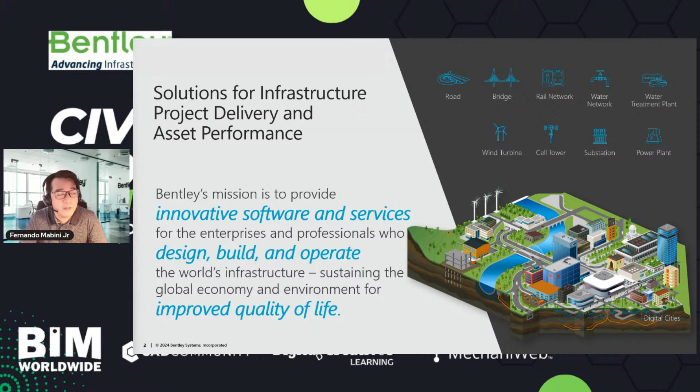But in civil, we stay focused on transportation. We have solutions for numerous industries, but today our focus will be more on civil works in general, specifically for the Philippines data set. In a gist, anything that involves moving people and goods around the world, Bentley has a specific solution for it. But let's start with a little bit of history of BIM, especially civil BIM.

So 30 years ago, our industry was living through the digital transformation of CAD, which was taking what we were doing on paper and moving that to the computer. And then there was the next disruption, from CAD to BIM, or building information modeling. So now, at this moment, our industry is advancing beyond that.

Okay, we are basically moving from BIM, and for the last couple of years, we at Bentley Systems have been working hard at adding the missing dimensions, such as the dimension of time and the dimension of context. Okay, so let me dive into our purpose for today. Our topic for today is about OpenRoads Designer, Philippines standard.

So what's inside this standard? What is this standard? So basically, the Philippines data set is actually composed of different types of engineering principle. What consists of the Philippine standard is the CAD standards, and we have a road standard details, and then we have the design guideline criteria and standards, or we call it in engineering as DGCS, or green book or blue book, or whatever you want to call it.

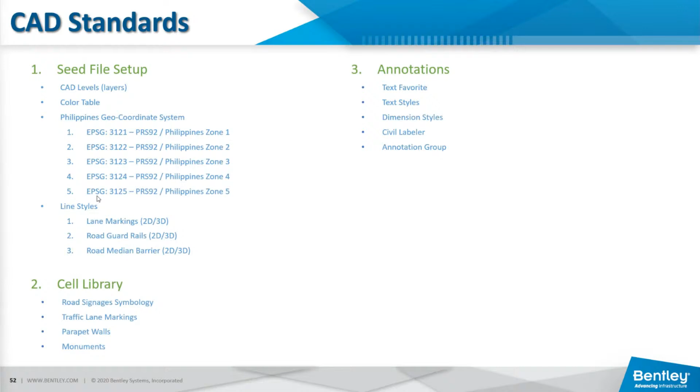Okay, so the next is annotations. We have text favorite, text styles, dimension styles, civil labeler, and annotation group. What are those? Basically, this CAD standard falls into our deliverables. What are those deliverables? The drawings. During the project, even though we are in a 3D modeling era now, the 2D drawings will not go away, maybe for the next 10 years or so. It will still be useful. That's why we still have CAD standards.

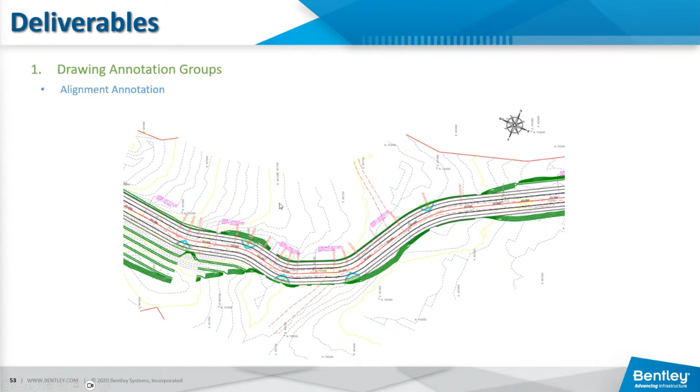So, in the drawing on the plan view, we call it annotation groups. We consolidate all those CAD standards and put them into annotation groups, and we apply them to every element that you see here in the alignment annotations. Even those contour lines have those CAD standards. Even the north symbol right there is part of the CAD standard as a cell. For the long section profile, the annotation group is also defined. For the cross section, annotation groups are also defined.

Okay, so now let's take a look at the roadway standard details. Basically, those roadway standard details are composed of pavements, the road kerbs, the slope protection. You have the guardrails, the signages, pavement markings, the monuments, as mentioned earlier, the traffic regulatory or prohibitory signages, the warning signages, traffic information signages, and chevron signages. So those are the roadway standard details.

And how about the DGCS? The engineering principle of the design. Those are in connection with the horizontal and vertical alignment. To the horizontal and vertical alignment, we apply a design speed, a superelevation, or road widening, so that when we create that in a model, we can determine the speed requirements of your road alignment.

All right, so now we're going to dive a little bit into the technicalities. We're going to create our project, and I'm going to show you the workflow of the project. So what is the workflow of the project? Let me show you some slides. Okay, there you go.

The advantage of OpenRoads lies in the continuity of the workflow from the preliminary to the detailed design stage up to the project delivery, regardless of the data deliverables your project may require. That means we are going to start with collecting all the data, be it the reality model, the point cloud, or the TopoCAD files.

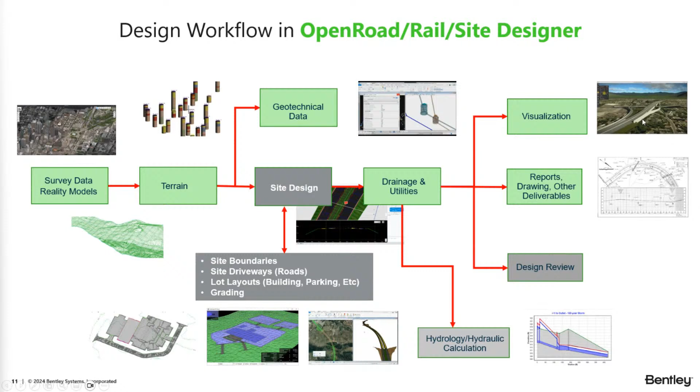Okay, so after that, we are going to create your site model or your road corridor. And then if there are drainages that need to be created, we are going to create them, drainage and sewer lines or utilities, and then drawing production for your deliverables, or design review platform. And then lastly, if you need to visualize your project, you're going to use our LumenRT application software.

All right, so let's dive into a little bit of technical workflow. Okay, so over here, let me see. Okay, all right. So I mentioned the Philippine data set. So let me just go back to the backstage right here. Okay, terrain model 002. Let me just go back to the backstage.

So what you see here is basically our OpenRoads interface, and let me close this file first. Okay, so you can see that the workspace over here is showing you Philippine standards. And then the workset right here, I'm using a specific zone in the Philippines, basically zone number 5. So over here, the workset is project specific, and the workspace is basically regional data or regional standard specific.

Okay, so you can see here in the list that I have Singapore standard, New Zealand standard, Australian standard right there, and so on and so forth. I have VicRoads standards. So those are the repository of the regional standards or the country standards. So when you need them, or if you have a project in that region, you will just use this workspace right here to look for that standard, or your project will automatically get all those standards from that regional standard data set.

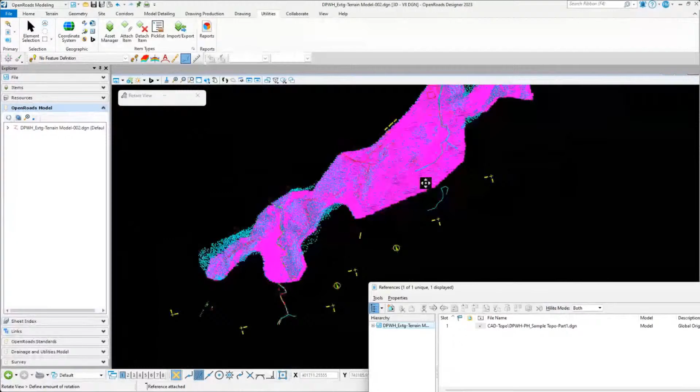And what I'm going to do is open up the reference dialog box and attach a file, a CAD topo file, for me to be able to create a digital terrain model. So what we have right now is a CAD topo. You can see here you have those numbers, you have the topo points right there, and if you rotate the file, you can see that it is not really that perfect. But what we actually need is only those points right there.

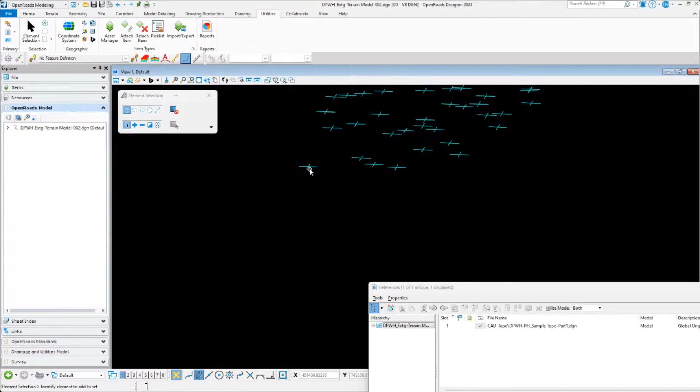We need those points to be able to create our terrain model. So we don't need all those things right there in the bottom. What we need is to confirm if these points right here are, number one, 3D. It has X Y Z value. So like so, you can see right here, it has an X Y Z value. That means you have the elevation, right?

So what I'm going to do here is turn off some elements that I don't need to create a terrain model. So I'm going to turn off some displays, such as this. We don't need some elements right there in the bottom.

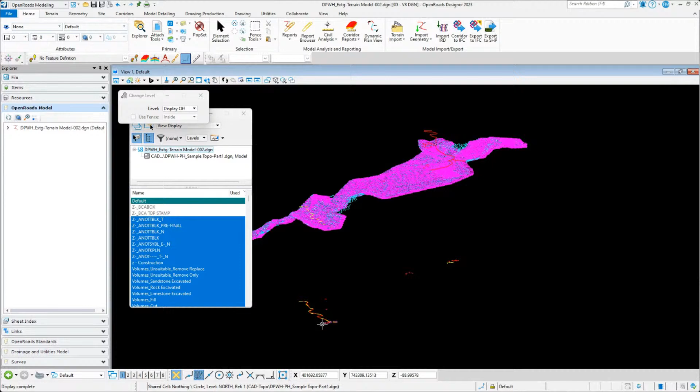So there you go. So I don't need maybe these fonts right there. What I need is only the survey points and those break lines that represent the existing roadway. Okay, so I'm going to select them all, and then I'm going to use the terrain tools, from the elements, create a terrain from the elements that I have selected.

Okay, so I'm going to use the Philippine existing contour. The feature type, I'm gonna go for a break line. Let's name this existing terrain. Okay, and then left click to accept that, so that it will create a terrain. So wait for that to be processed. It's not going to take a lot of time, maybe less than a minute. It will create you a terrain model.

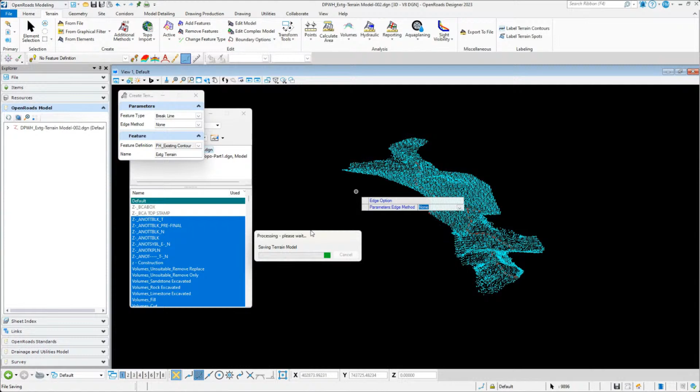All right, so there you go. So now let me just turn off my reference dialog box. And then you have your terrain already. If you take a look right here, let me just change the property, maybe open up the triangulations and change the display. I'm gonna change the display into shaded. All right, so my terrain is going to look like that.

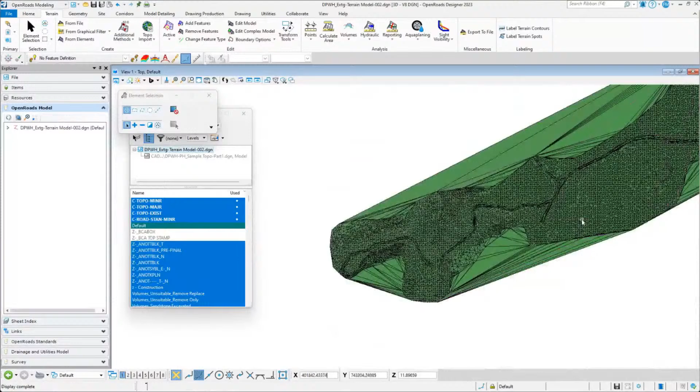So if you want to edit the terrain, remove all those triangulations that are not necessary. If you can see here, there are unnecessary triangulations on the edges or on the boundary of your terrain. You can use the edit model tool and then select the terrain and then delete all those triangles that you don't need. Okay, so there you go. So that's the first thing that you are going to do.

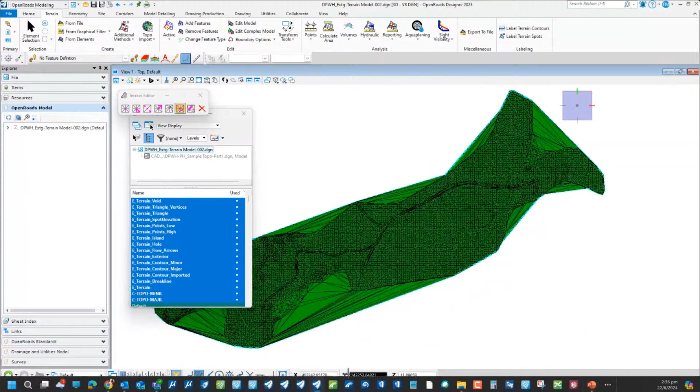Right, so now after cleaning up your terrain, that is basically ready for your alignment creation or your road project creation. So you notice that there's a road access right there, an old road maybe. There's a parent road, so we can trace them and then create a new road for that using the break line that we selected earlier on. Okay, so let's go over here and speed up.

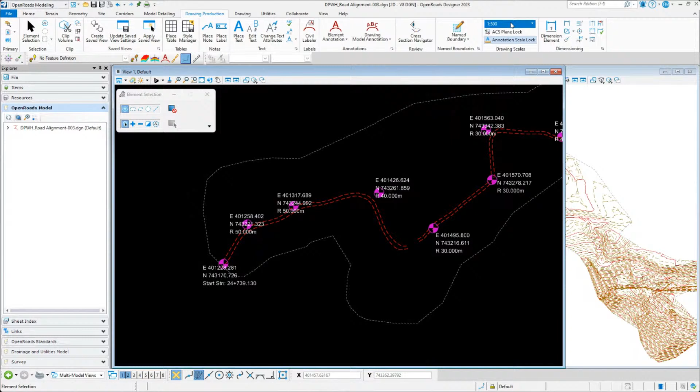Basically, I'm going to use those points right there to create an alignment. So let me just turn off maybe 1 to 100, maybe 250 right there. Okay, so there you go. I'm going to use those points right there to create my alignment.

So you can see right here that I can use a feature definition, an alignment specifically for the Philippine standard. So that means this feature definition will hold all those CAD standards, and it can be applied to a Philippine standard design. Okay, so if you choose that and let it be activated, you can see here that I have the tool called Design Standard Toolbar.

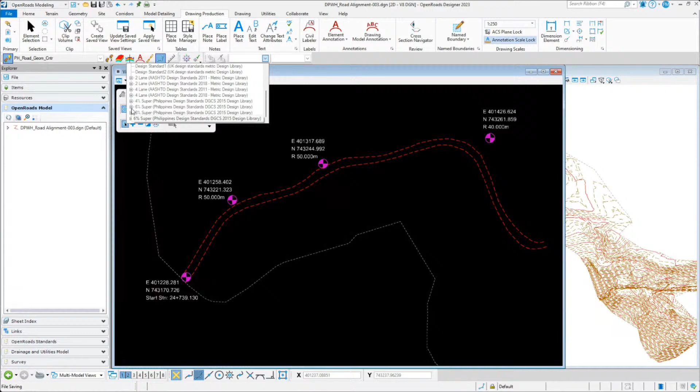Okay, so from here, let's say that the road is basically under 6% of super elevation. So you can choose this, let's say 4% super elevation. You can also choose the speed requirements of the road. Okay, so maybe let's not use that for a moment. Let's create an alignment using all those setting out points that we have.

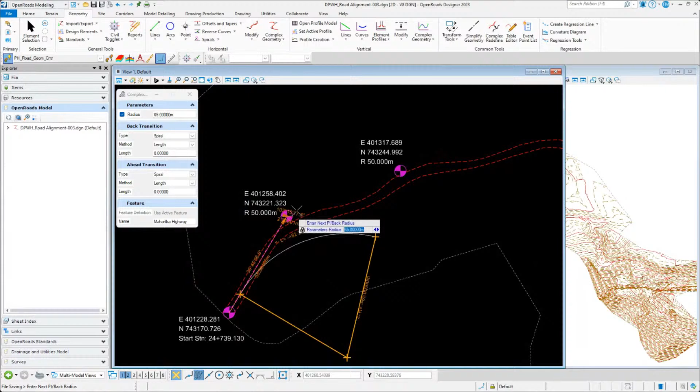Okay, so let's say, for example, this is Maharlika Highway. My radius at this moment is 65, but I can change that later on. Okay, so I'm going to pinpoint those setting out points right there. So I'm going to change this according to the requirements. It says 50 meters radius. So I'm going to type that in. So like so. This one here is 50 meters radius as well.

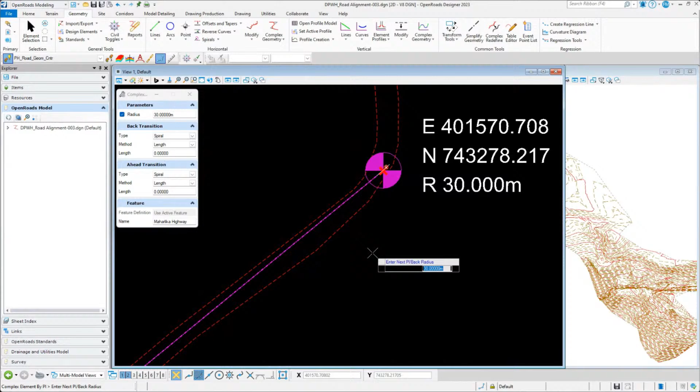Okay. So this one is 40 meters. So I will just go and carry on through. This is 30 meters, right? That is 30 meters as well. 30 meters as well. So 45 meters. So I'm gonna just type it in. Okay, so I will just carry on following those parameters. Okay, so 30 meters. Over here is 35 meters.

And this one is 80, 120. Okay, so maybe we'll stop here. All right, so there you go. Now let me see here, maybe 25, put it back to 30. So sometimes you stumble upon those kinds of things. Okay, so now I have an alignment right there.

So what I can do with this alignment, so remember that this is a 2D environment. You'll see here, I'm in a 2D environment in Bentley Civil Solutions. You are going to work in the 2D environment.

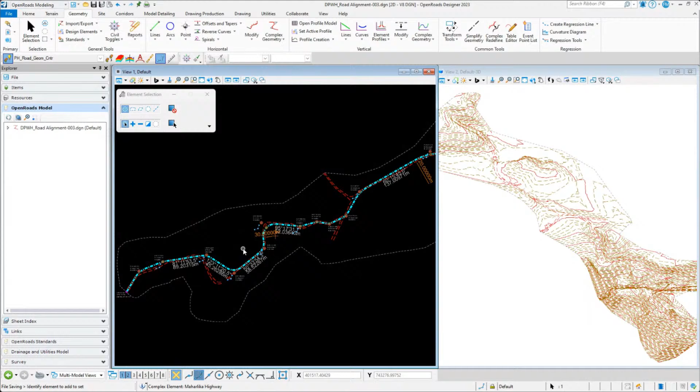So I understand that this is 3D modeling, but this platform is a little bit different. Based on an engineering principle, we are working in the 2D environment. So after that, I can open up the reference, the profile, and then you can see that I can create a vertical profile right there. I can exaggerate the vertical scale.

Okay, so most of the time we are going to exaggerate that vertical scale from the view attributes, maybe on the scale of 10 or so. Okay, so over here we have the vertical tools. We have different tools for horizontal on the plan view, and then vertical tools on the profile view. Okay, that is very important.

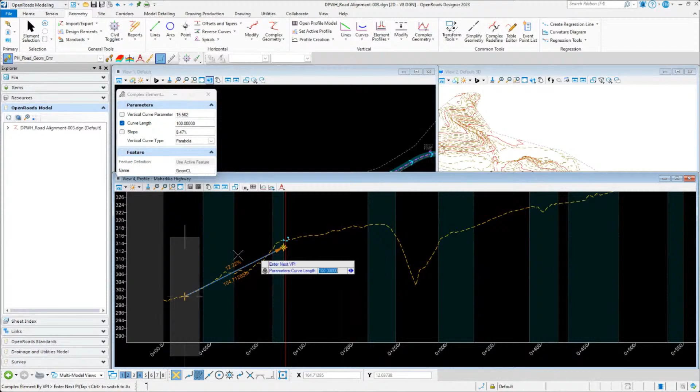And then over here, I'm going to use the profile complex by VPI. I'm going to maybe just arbitrarily create an alignment. Okay, so like so. Okay, so there you go. Maybe just following through the profile that I have already. Okay, so there you go. So now I have the vertical alignment.

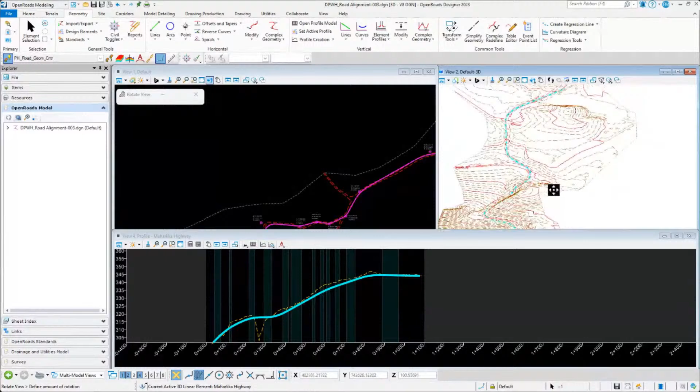Now watch, take a look right here. The moment I activate this alignment, it's going to create a vertical profile or a 3D model over here. Okay, you can see that 3D model of that alignment. So that is the only way that you can see it in your 3D preview.

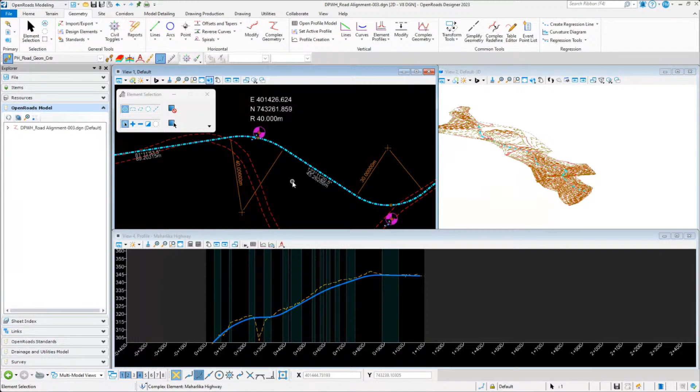Okay, so you can see that all of these elements right here are composed of a Philippine standard or a Philippine CAD standard. So when you use this PH road geometry center line, this is the color, the line weights, and the line style of the Philippine CAD standards for road alignment.

Okay, so over here, I can place an annotation on that alignment. Okay, there you go. You can see all those annotations right there, also based on Philippine standards. So let me just turn off those dark fields.

All right, the equivalent software from Autodesk is Civil 3D. That is correct. Okay, so before, DPWH was using Civil 3D, but they shifted to much more logical software such as OpenRoads or the Bentley platform. Okay, so you might need to take note of that.

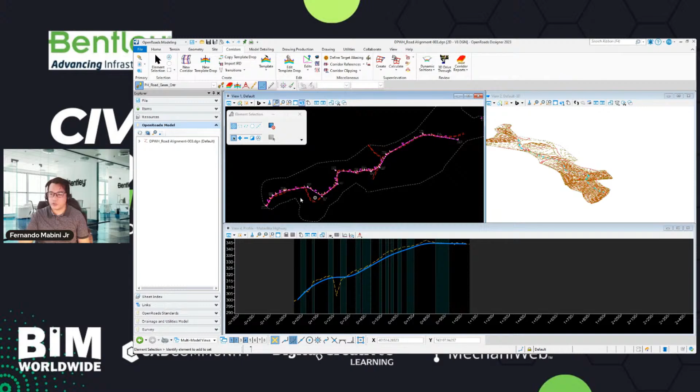All right, so now I can use this alignment because I already have the vertical profile. I can create a corridor out of that. So you can see here I have the templates, because I cannot create a corridor without the template. So you can see that I have multiple templates right here, basically based on DPWH projects.

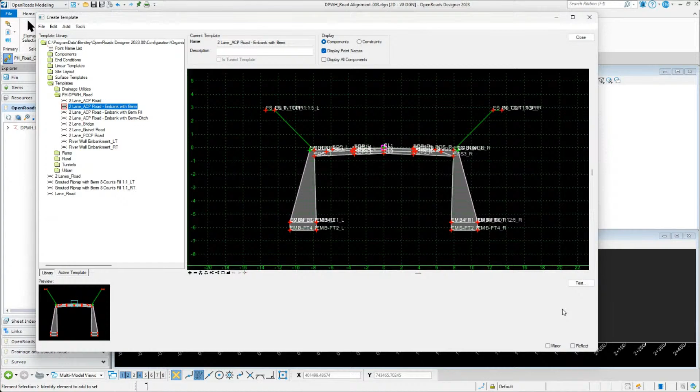Okay, you can see here I have the ACP road embankment with berm. Let me see here, the embankment with berm, because this is the most common. Right, so I'm going to take a look at the behavior of this template. So I'm going to click on test. That means I can only see the pavement.

Now when the level of the terrain hits any of these elements right here, the berm and the embankment, you can take a look at what is going to happen. Okay, so I'm going to draw the level of the terrain. You can see right there. That white horizontal line is the level representation of the terrain model. Now when it hits below the grade line, it's creating a berm.

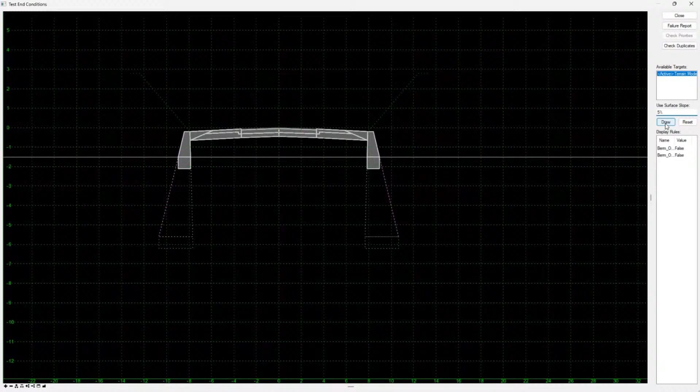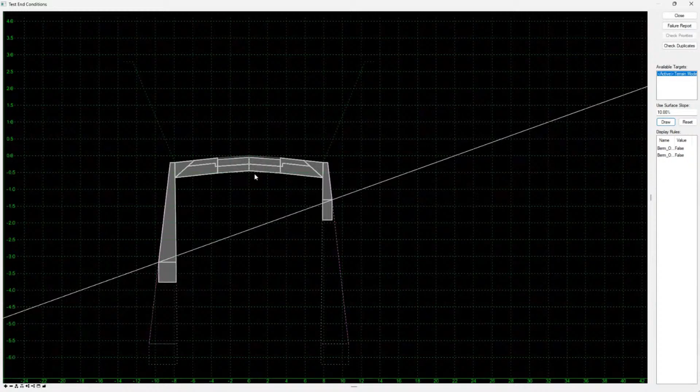So you can see here, even if I change the gradient, or the angle of this representation of the terrain model, you can see what's going to happen. Let me see here, maybe 10 percent. Okay, so let me draw that. All right, so you can see the one right there is creating a cut grading, and the other one here is creating a fill grading. Right? Okay, so that is the behavior of the template.

Okay, so let me use this two-lane ACP, or asphalt concrete pavement, road embankment with berm. You can use this one as well if you want. So let's take a look first at the behavior of this. Right, so there you go.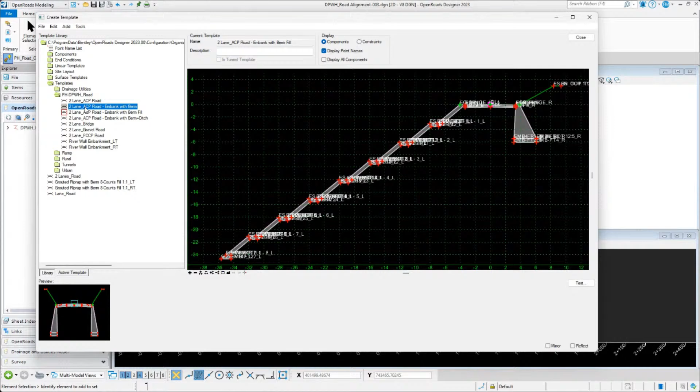Okay, so let's use this two-lane ACP or asphalt concrete pavement road embankment with berm, right? So I'm gonna close that, and I'm gonna use this corridor tool right there. I'm gonna select this alignment. Okay, so I'm gonna name this Maharlika Highway. I'm gonna left click to accept that naming convention. Okay, and then I'm going to look for my Philippine dataset library.

As I mentioned, I'm going to use this two-lane ACP road embankment with berm. Let me see here, this one. Okay, I think this one is much better. Let's use this. Okay, so I'm going to lock to the start, left click to accept that, and I'm going to lock to the end, accept. Okay, drop intervals 3. So take a look right here in the 3D preview, what is going to happen. All right, so there you go.

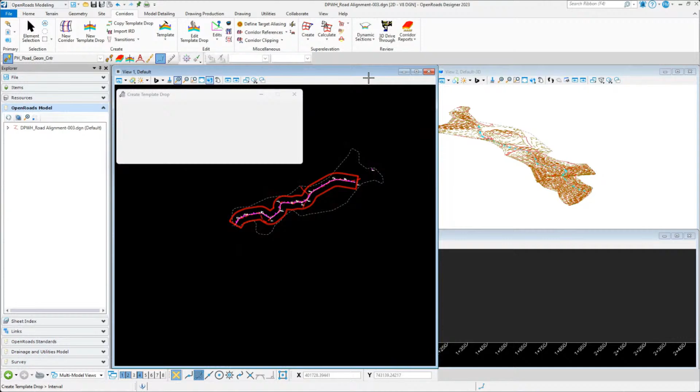So it created me a road project immediately with a berm, and on the side with a cut grading with a benching. Okay, so right there I have those berms. Okay, and the road is the asphalt concrete pavement based on the Philippine dataset. All right, so there you go. That is how you can create your road project.

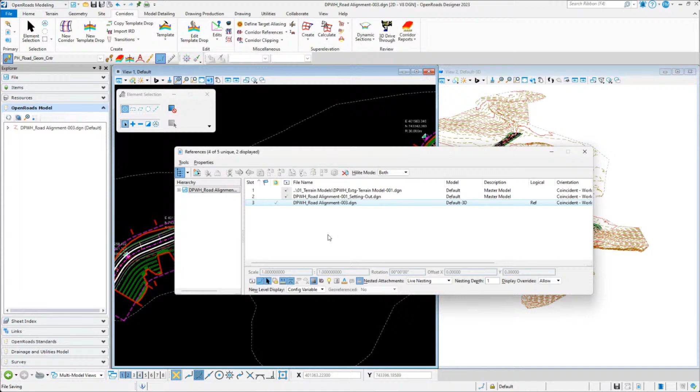Okay, so over here at the 2D model, it's also created. So keep in mind that there are two views here, the 2D and 3D views. And most of the time, 99.9% of the time, we are working in the 2D environment. So notice that I worked in the 2D environment, both horizontal and vertical, and it created me a 3D model. Okay, so that is basically how it works here.

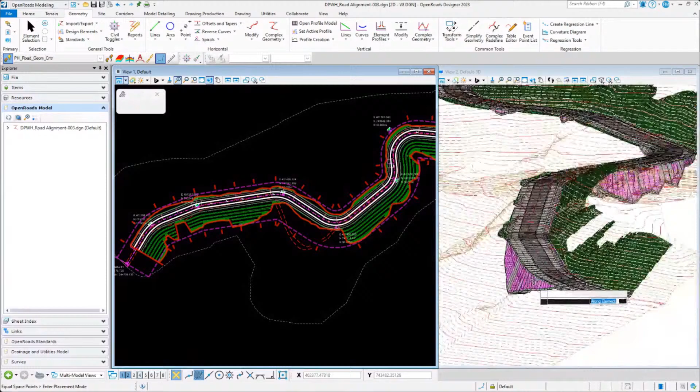So now, if you take a look, let's go back right here to the geometry tab. As I mentioned earlier, maybe in this area right here, I will create parapet walls. If you are familiar with traveling along the Maharlika Highway, you can see all those parapet walls. So I can choose those parapet walls over here. Okay. So maybe this 1.5 by 50 by 50 by 50 3D parapet wall.

Okay. So I'm going to use that, and I'm going to use the placement mode along. Okay, so I'm going to use this area right here, start method, stop, and then the spacing is interval. Okay, so maybe I will go to the drawing production, and there you go. Okay, so interval, maybe this one here is 1.5. Hold on, I'm looking at the, maybe 2 meters. Let's see here, 2 meters of interval. I'm gonna start right there.

Okay, so you can see the parapet walls right there. Okay, that is creating. So I'm going to place it maybe until this point. Okay, right. Offset is basically, let's say 0. And then elevation plan is this area right here. Elevation offset, just 0. Okay. And then reference point right there, rotation is basically 0. All right. So there you go.

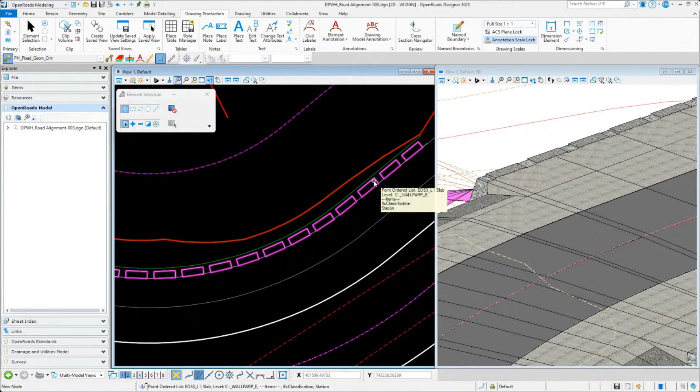So over here in the 3D view, if you take a look right there, oops, let me see. Let me take a look right there on the rotation value. Okay. Sorry, on the elevation value. Right. So there you go. So it seems like my elevation is a little bit off. Offset value, that's maybe 0.6 offset. Elevation mode, plan element.

Yeah, there you go. Maybe that's gonna be 0.5. Okay, 0.5. All right, so there you go. So now you have your parapet, and then you have your 2D parapet, and then you have your 3D parapet. So basically, it's very easy to create your parapet wall.

So let's say, for example, I'm going to create my vehicular guardrail. So for the vehicular guardrail, I can use this offset and tapers. Okay, single offset partial.

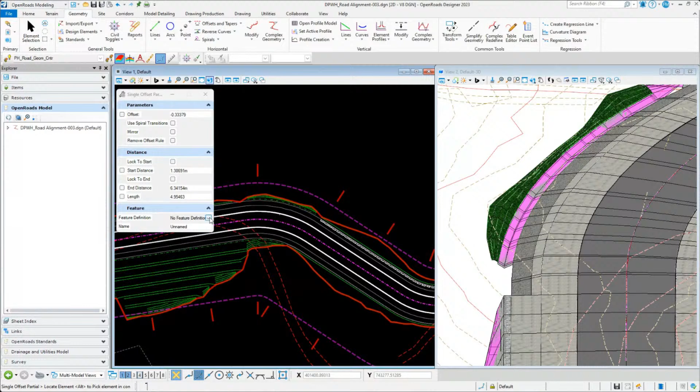So I'm going to use the align under the linear over here, and then under the guardrail and barrier, I can select the left side guardrail single. Okay, so there you go. I can use all those lines right here that are available.

So let's say, for example, this line. Okay, so you can see that I'm creating a guardrail right there, maybe on the offset value of 0 from that line. Okay, so maybe I'm gonna start right there, all the way to just touching the parapet walls. Okay, so there you go. So you can see basically how those parapet walls have been created.

All right. So how about if we place some signages? Okay, so we use again the point feature definition. So let's say, for example, I'm going to select a signage here, chevron sign, but maybe just a warning sign over here. I'm not sure what this is, the W1-1L. I forgot already. Okay, so I'm going to use this line right here for the road, just arbitrarily. I'm going to place these signages here, facing that area right there.

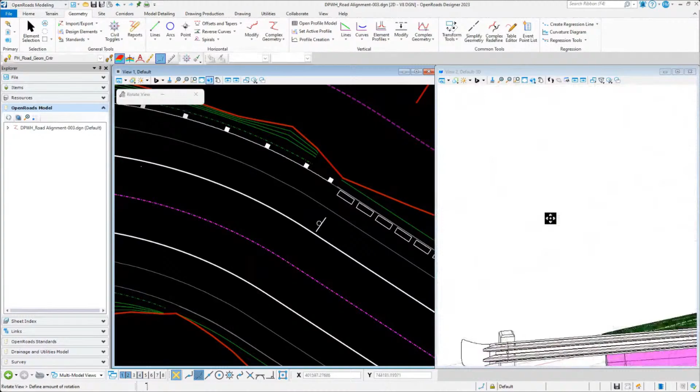So let's take a look. What is that? Right, so there you go. Okay, all right. So let's do it again. Okay, maybe another one. This one. Okay, yep. So there you go. You have the 2D and then you have the 3D symbology.

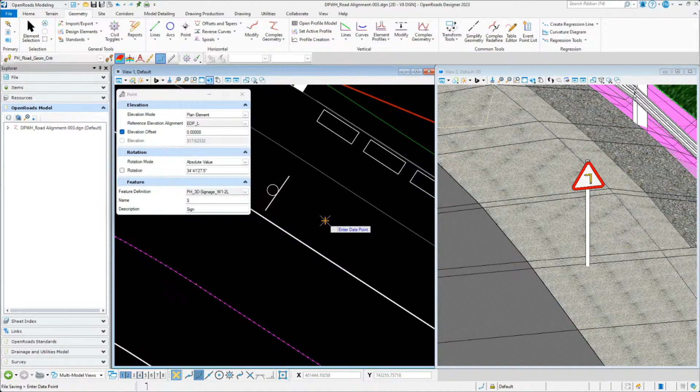So that is how OpenRoads is basically operating. Like for example over here the vehicular guardrail. All right, so you have a different symbology on the 2D view for the drawing representation, and you have a different symbology on the 3D view. All right.

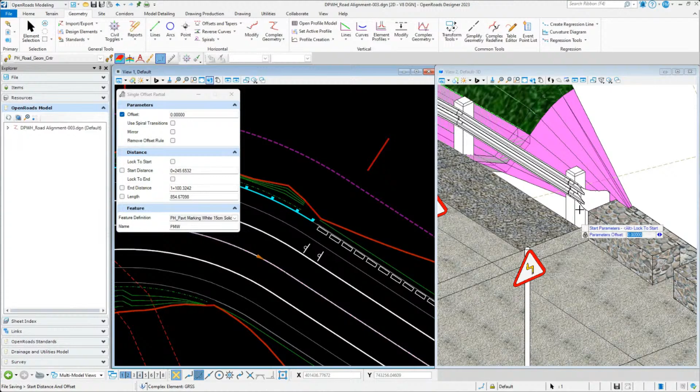Okay, so how about if we create a lane marking? So we use this lane marking right here, the PH pavement markings. So maybe this 10 centimeter solid or the 15 centimeter solid. Okay, so maybe we use this over here, and let's take a look right there in the middle of the road. Position our camera view so we can see it.

All right, so there you go. So maybe we start right there, just for example. Okay, so there you go. I can create our lane marking immediately. So let's do it again. Maybe the yellow one, 150 yellow, pavement marking, 150 yellow. So maybe on this 3.5 value, or maybe 1.5 only, for us to just see it. Okay. All right. So there you go.

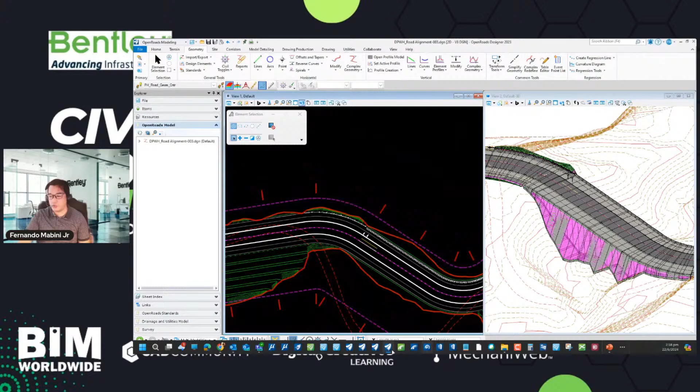Okay, this is how easy it is to model highways such as Maharlika Highway in OpenRoads, right? So after this, you have already placed your road markings. You have already placed your parapet walls. So all you need to do is basically compose them all together. So I have this data right here to compose them all together.

So you can see here I have a little bit of bridge. I have the embankment, or the wall of the bridge right there, or end wall and approach wall, and then I have those parapet walls right there. I have clipped out the portion of this terrain model. Okay, so this is an example of the finished product. So I have all those junctions or interchanges created as well.

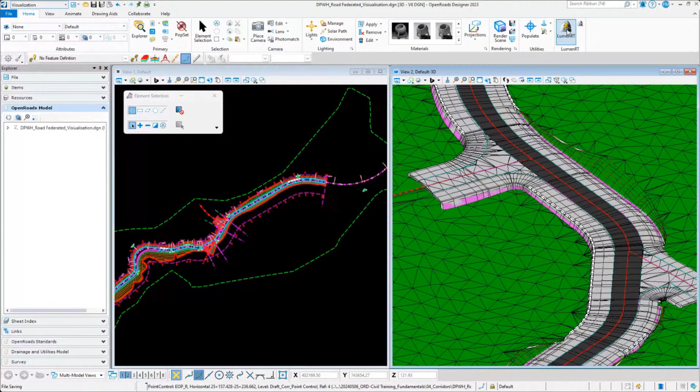So all you need to do after that is go to the workflow right here, change the workflow to reality, sorry, to visualization. Okay, hold on, let me change that to visualization. And over here, we have what we call our rendering tools, or a visualization tool called LumenRT. So you click on that, and it will process the model. So what it looks like after processing the model is this.

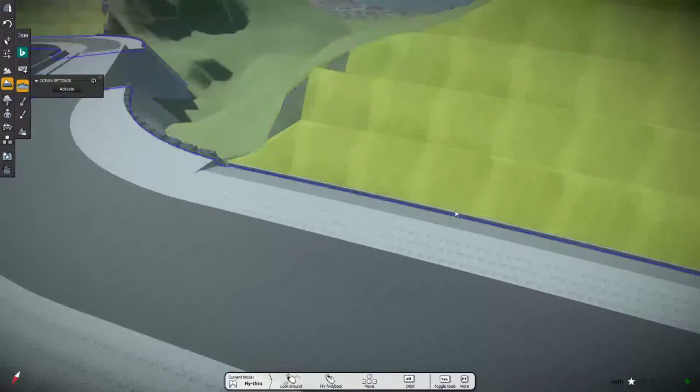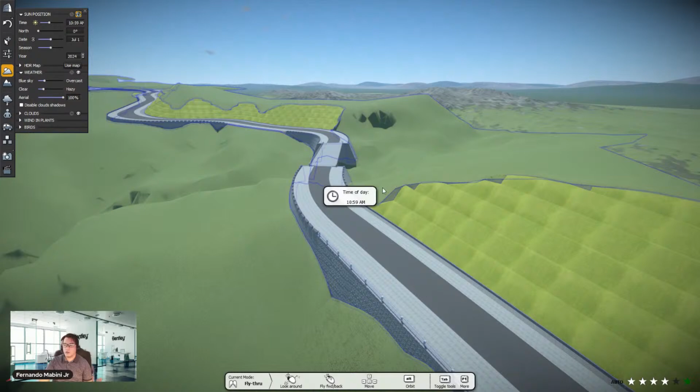Okay. So right here, you can see an example of a ready to render model. From here, I have already placed the grassland on the terrain and those embankments right there. You can change or adjust the quality of the render. And then you can see here that I can change the environment. Over here, the weather, the blue sky, I can create the blue sky. I can change the time. So basically, this platform will help you render your model better.

Okay, so maybe I will place some trees right there. So just give me a moment. This will not take a lot of time. Okay, so over here I can place vegetation. That easy. Okay, so there you go. I can increase the size of my brush so that I can easily place those vegetations right there. Okay, like so. Right. So let me just put on some more.

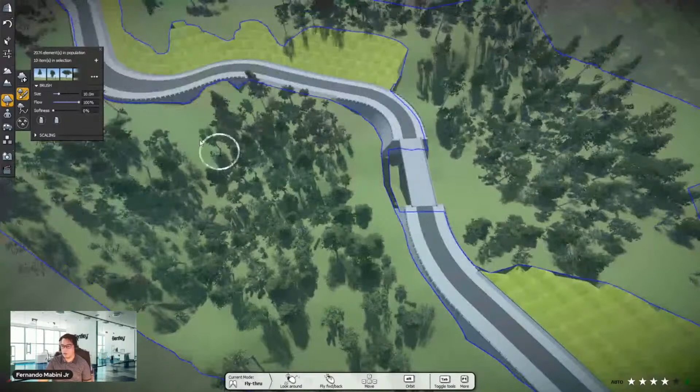Okay, so after that, maybe I can put on some more over here, some more right there. Okay, so after that, basically you can place some vehicles. If you want, you can create a moving traffic: populate along spine or populate inside an area. So most of the time I'm using this populate along spine.

Right, so over here I can create a fixed distance, maybe from here to here, but over here I can also use this create a traffic. And then I can add up the density of the vehicle along that direction, and I can change the minimum speed and maximum speed. If it is a two-way lane, maybe I will just say one lane only. The width of the lane maybe 3.5, that's going to be okay.

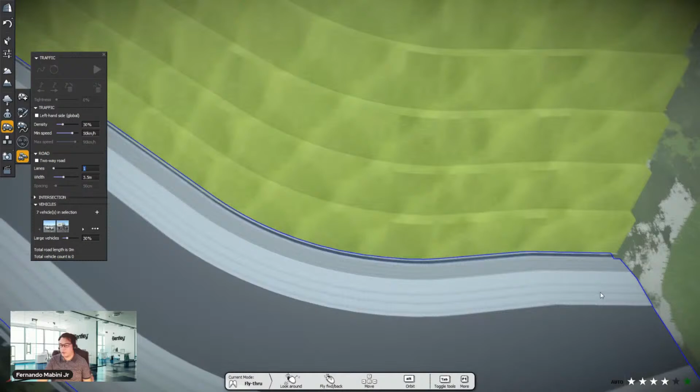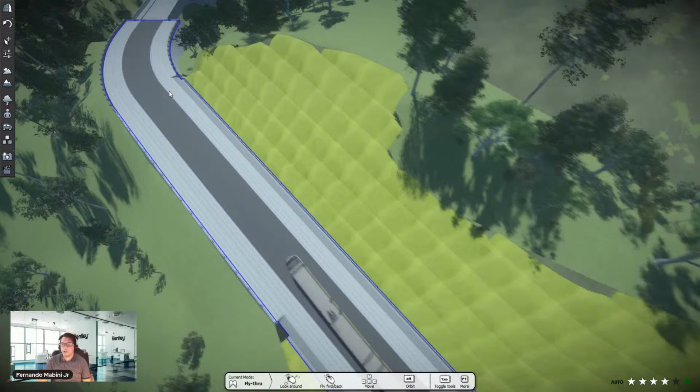So now I can be able to place my traffic from here. Maybe let me see here. Okay, I'm gonna use that arrow right there to basically create a traffic. Maybe I will just stop right there, and then I will press the play button. Okay, I don't know why there's a rail MRT here, so let me just delete that.

Okay, let me undo from the selection. Let me just take a look at my selection so you can see, oh, because I have that one right there. So let me go right here and uncheck that as part of the selection. Let me just go over here to trucks. All right, so anyway, I'm going to start again.

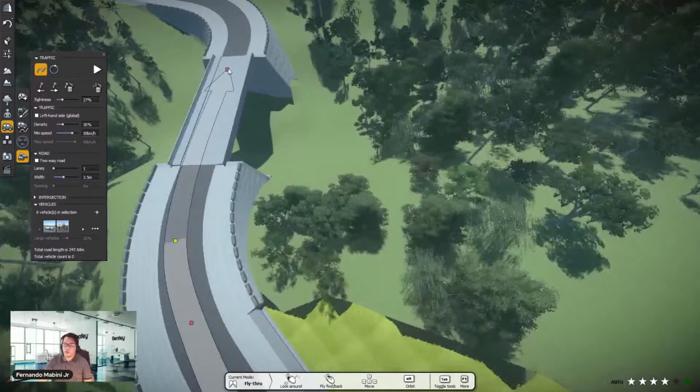So maybe from here, okay, so all the way through. Maybe let's go beyond that bridge, right? And then hit the play button here and take a look what it's going to happen. Okay, like so. All right, you can place some people. Let's say, for example, there are people right here, basically on the side of the road. I can use this right there.

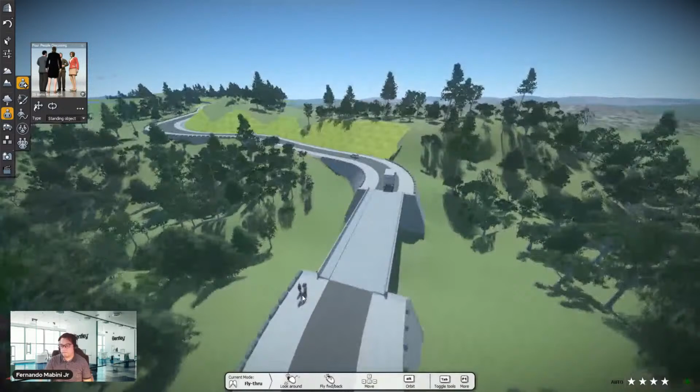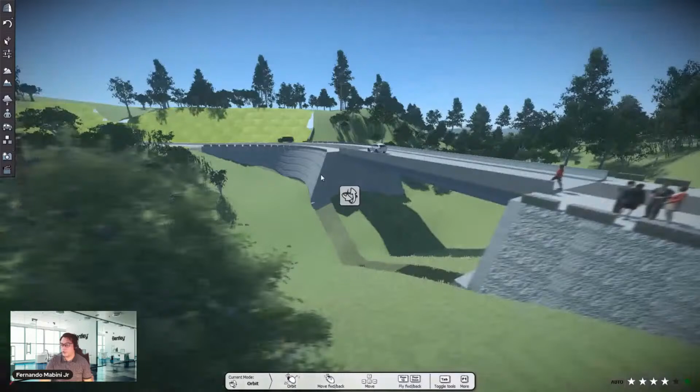Okay, let me see here. All right, so there you go. Maybe let's go farther from the road. I can create a moving people, something like this lady right here. Maybe I will change her direction. Okay, so there you go. And now, when you take a look right there, basically, it lets you create a realistic real world scenario of your project.

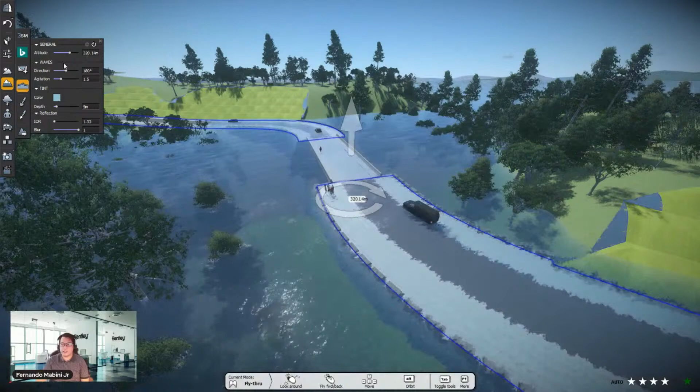Okay, so say for example you want to turn on the water level, so you can see that there's a water level right there because you have the bridge. So maybe we might as well have that water. Okay, so there you go. All right, so basically that is the OpenRoads Designer, and this time we are using the Philippine dataset.

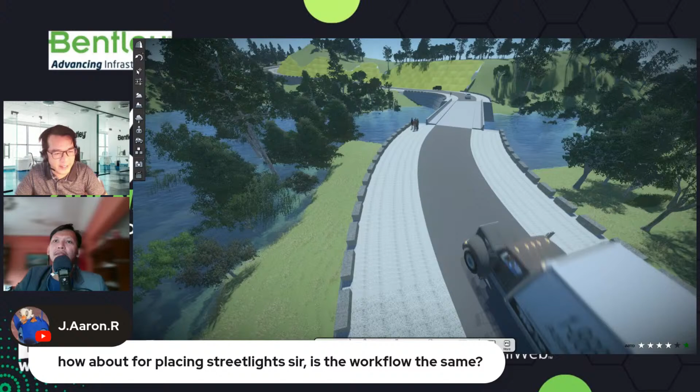Okay. So, Sir Aaron says, how about placing of the street lights? Is the workflow the same? You are correct. The workflow is the same for placing the street lights, the same as placing of the signages or the street lights or the traffic lights. Okay, I hope that answers your question.

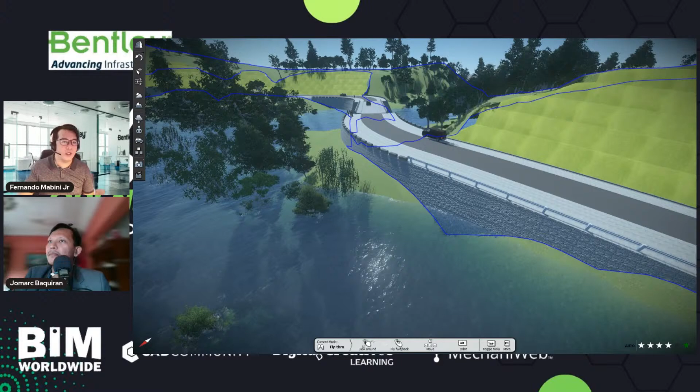Definitely po. We have Bentley Learn Server. I think, let me see here, because we have a new platform of Learn Server. Okay, so let me see here. Let me drag this. Okay, so we have the Bentley Learn Server po, learn.bentley.com. So this is the go-to platform when you want to learn the software. So it's not only one software of Bentley.

Basically, if you take a look right here on the brand, you can see that there's a lot to learn from: building, OpenCities, OpenFlows, plant, road, site, rail. So you name it, we have it. Basically, we are the most complete solution company. We don't call ourselves a software company. We call ourselves a solution company.

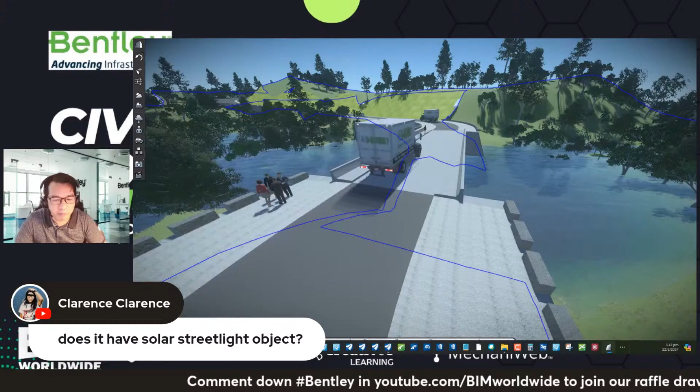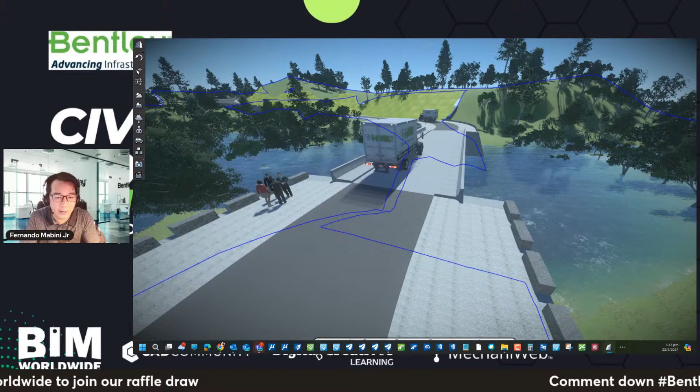All right, so we have a question from Ma'am Clarence. Does it have a solar streetlight object? At the moment, we don't have a solar streetlight, but you can easily create it yourself. For example, the vendors for streetlights have ready-made CAD files for you to use, and the data set that we have is customizable. It's not a hardwired setup, so you can create project-specific libraries. I hope that answers Ma'am Clarence.

So once more to our viewers, Sir Fernando is based in Singapore, so he has a bird's eye view of the status of the Philippines in comparison with our ASEAN neighbors. What's your take on that, Sir Fernando? Are we far behind, are we advanced? The answer is yes and no, sir. In terms of the skill set, Filipino talents are really at the advanced stage. The BIM modelers in the Philippines, be it building or civil modeling or any kind of BIM modeling, are already advanced.

But from the BIM management point of view, we are far behind, because even at the constitutional level we are still not there yet. We don't have the BIM standard. There is nothing you can download from the government site for the BIM standard. We don't even have the BEP or the BIM guides. We don't have that yet.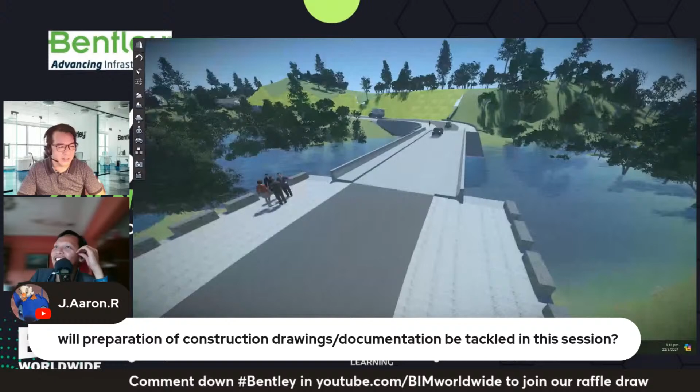All right, so we have a question from Sir Aaron. Will preparation of construction drawing documentation be tackled in this session? Do we still have time, sir? Yes, absolutely. Basically, I focused on modeling only. Can we customize parts in OpenRoads? The answer is yes. So let me go back. Over here, let's say for example, I go and create a drawing.

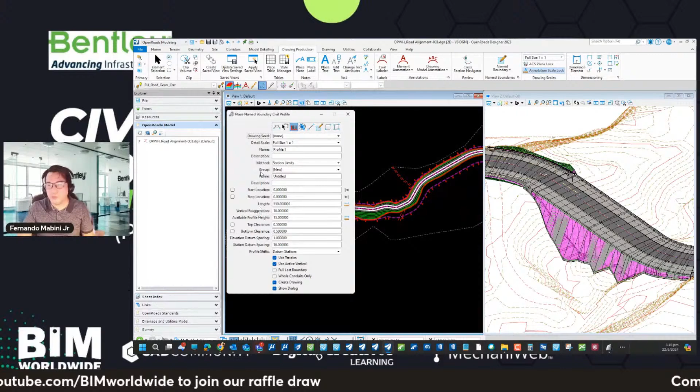The drawing production in OpenRoads is relatively very fast. So let's say, for example, I'm going to use this plan here and create a drawing. The boundary is 0 right there, overlap, I might change that too. You can see that it's creating a rectangle object. Those rectangle objects represent your drawing paper. Let me just change the overlap right there.

So over here, I'm going to carry on, create the drawing, and just say yes, create my drawing. You can see that it didn't take 5 seconds for me to create the drawing, right? So I already have this drawing created. So there you go.

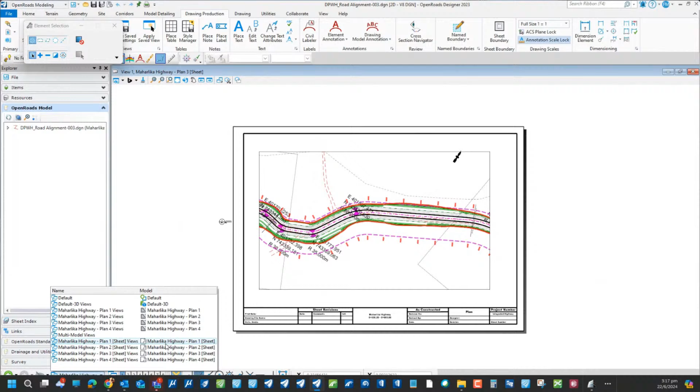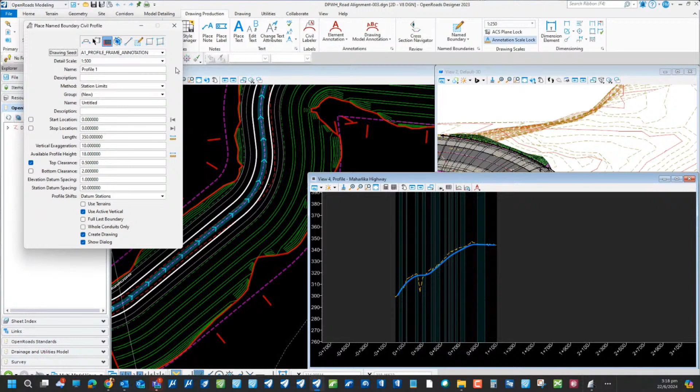Okay, very very fast. So let's say, for example, let me just go back to my drawing and open up my profile right here. Okay, so what I'm going to do here is I'm going to create a vertical profile. I'm going to use this frame profile with frame annotation. I missed the creating of the super elevation, but basically we can create a super elevation very, very fast here. So let me just move on.

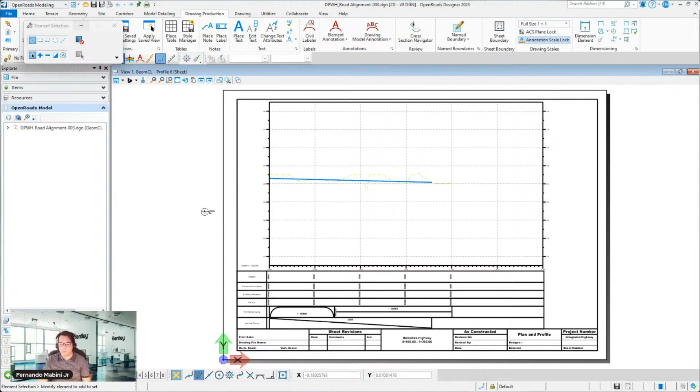So you can see right there, I can basically create a profile drawing in a very fast pace. Let me just wait for a while. There you go. So now you have your vertical drawings. Profile number 6, something like that. All right. So I hope that answers the question, Sir Aaron.

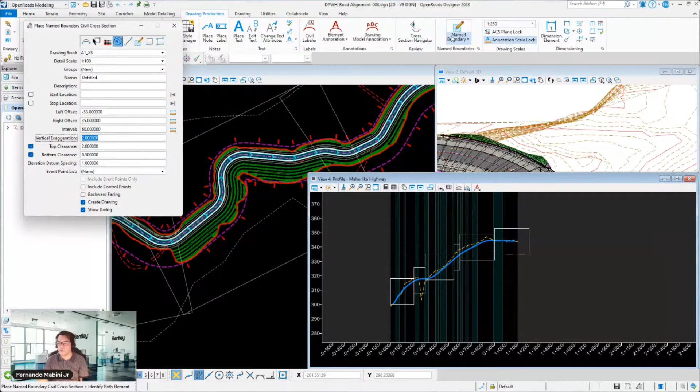Okay, so let me just go one more here. I'm gonna give you just a normal cross section here. There you go. Just a normal cross section at an interval of every 60. It's gonna create a cross section, but of course you can still create cross sections according to your liking. So I'm gonna start right from there, all the way through, create a cross section. And then I'm going to say yes, create my cross section. I need it in 1 minute.

All right, so there you go. You have your cross section drawings. Very, very fast and effective. Before, when we created drawings for this kind of model, it took maybe 1 week or 2 weeks. But now it didn't even last 5 minutes. I already have plan view, plan drawings, profile drawings, and cross section drawings.

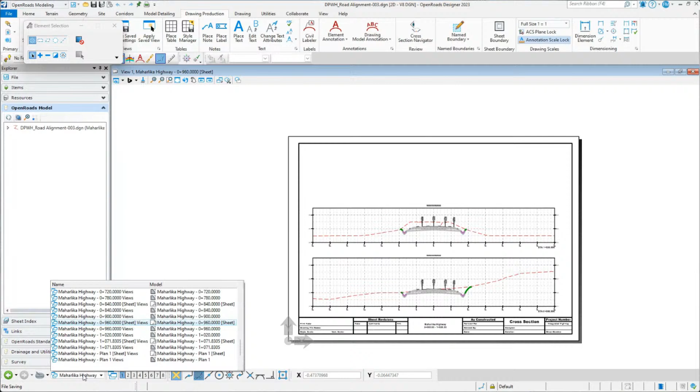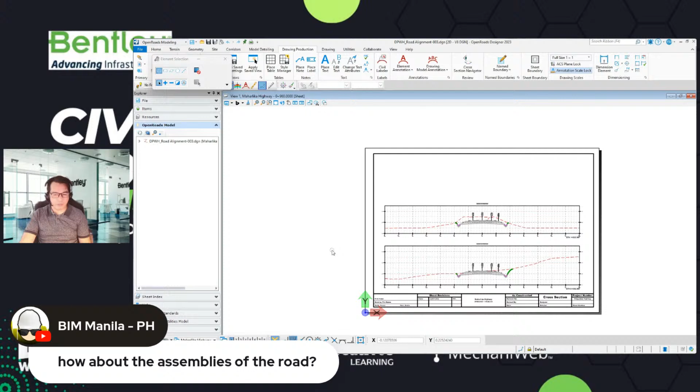BIM Manila asks, how about the assemblies of the road? The assemblies of the road are according to our templates, which I already showed you earlier. In this template, we usually use these components right here. We have curbs, ditches, and pavements. What we do is combine them together, so we don't need to create them one by one, even though you can create a simple constraint pavement one by one.

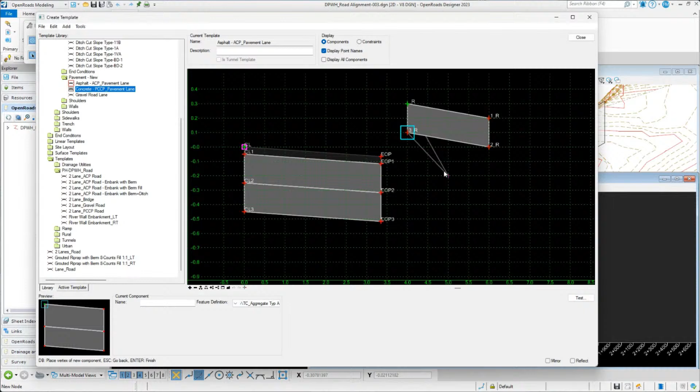We can create those kinds of components, but for the Philippine dataset, you already have all the things that you need. All you need to do is combine them together to create your road model, something like this. So it's very, very convenient.

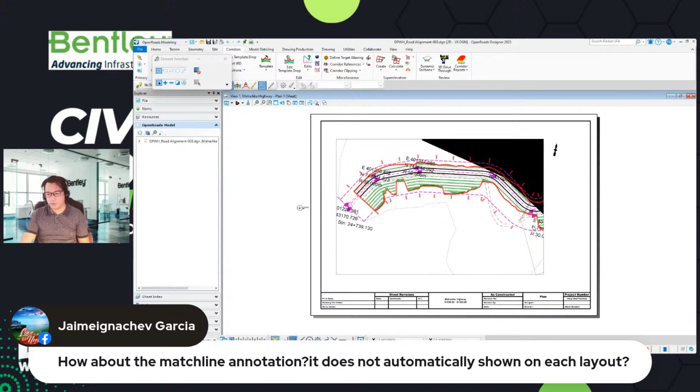Any questions? So how about the matchline annotation? It does not automatically show. I think it shows. Let me see here. The plan view, plan sheet one. Yeah, you can see that we have the match line right there created. So I hope that answers, Jamie. Okay. Sir, back to you.